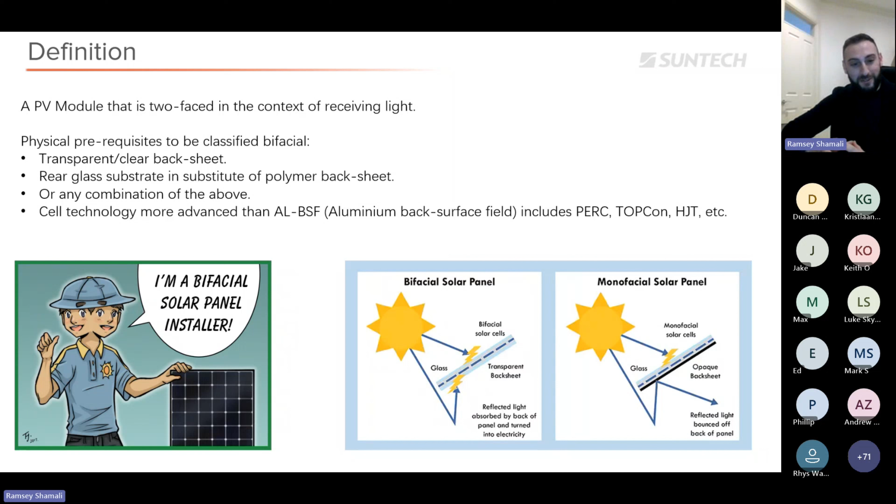So I just put a little graphic there of the installer. So if you know any installers who are two-faced and tell you one thing and tell someone else the other thing, then you can call them a bifacial solar installer. I know, a very good dad joke.

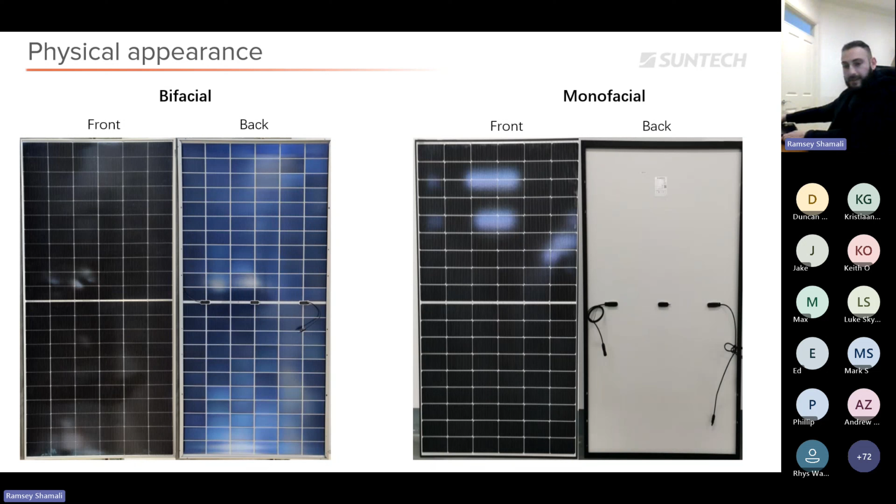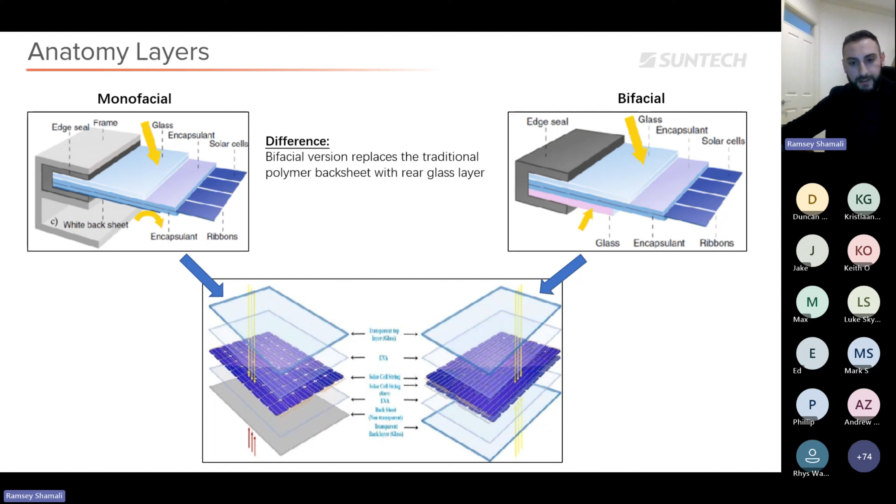So the anatomy layers are as follows. Monofacial and bifacial, what are the differences? Simply, the bifacial version replaces the traditional polymer backsheet with a rear glass layer. Everything up until there is the same. So the frame, the glass on the front, the encapsulation on the front, clear, obviously. The solar cell is the same. The rear encapsulant also will be the same. And then the last layer will be a backsheet in the monofacial, but in the bifacial, it will be replaced and swapped to a rear glass layer. And that gives it its transparent design inherently, organically, right?

Carports, on the other hand, they are elevated, they're above the ground with some height, and therefore there is potential for rear side gain.

Obviously, flat roofs are installed with tilt leg racking systems predominantly because they need to be tilted to avoid being installed flat, which most manufacturers don't warrant due to obvious reasons. And similarly with ground mount, you have either fixed tilts or tracker systems, whether it be single axis, dual axis, horizontal, or portrait. And all of these have a good utilization score because of having the rear side more visible to sunlight.

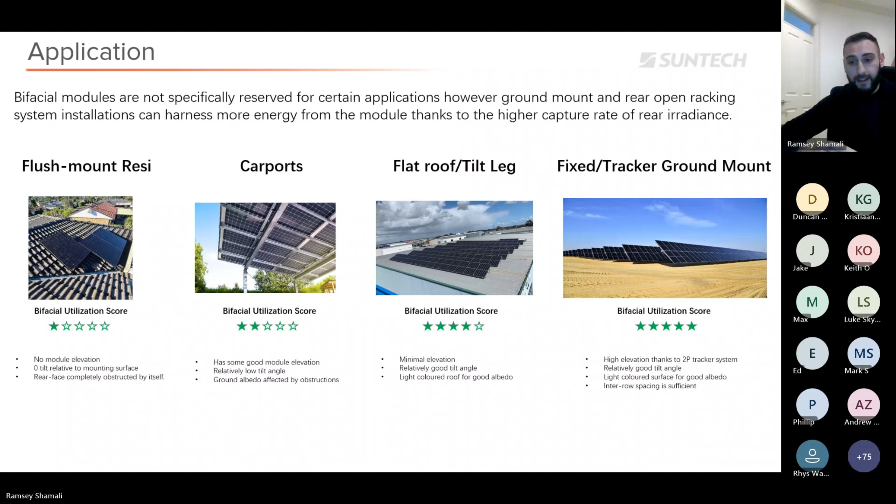There is some confusion in the industry. There is double glass products, but they're not bifacial. So what does this mean? Dual glass does not automatically translate to bifacial. There exist products on the market which are dual glass, but not bifacial. The reason for this is they have utilized a white opaque encapsulation layer on the rear. So normally encapsulation, the EVA or POE, which is the normal material used, is clear traditionally. So we don't even think about it.

But it is an existing layer always between the cell and the glass, or the cell and the back sheet for the rear side traditionally. But for these new products like our NSHKM Plus model or other products on the market from other manufacturers, when it's dual glass but it's a monofacial product, it's because yes, it has dual glass, but on the rear side behind the cell, there is an encapsulation which is white. Hopefully that clarifies it. So a product can be dual glass, but not bifacial. But it can also be dual glass, but bifacial. So dual glass does not automatically mean bifacial, but bifacial does automatically mean it's transparent.

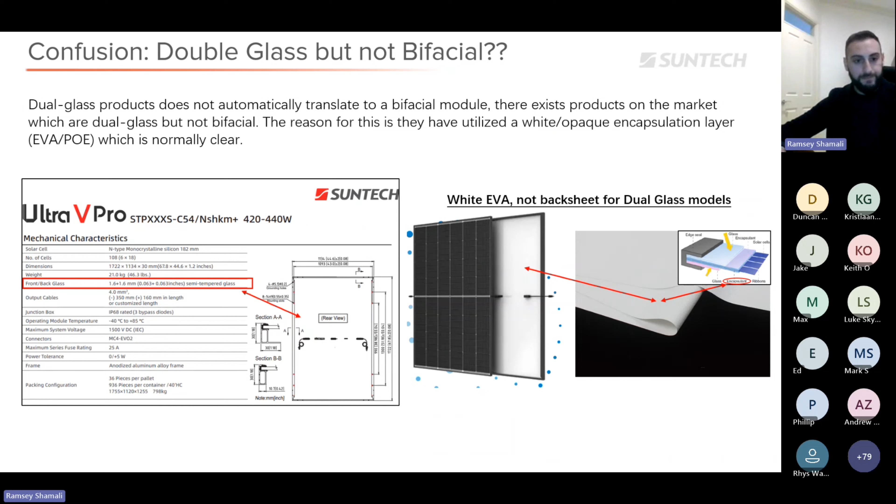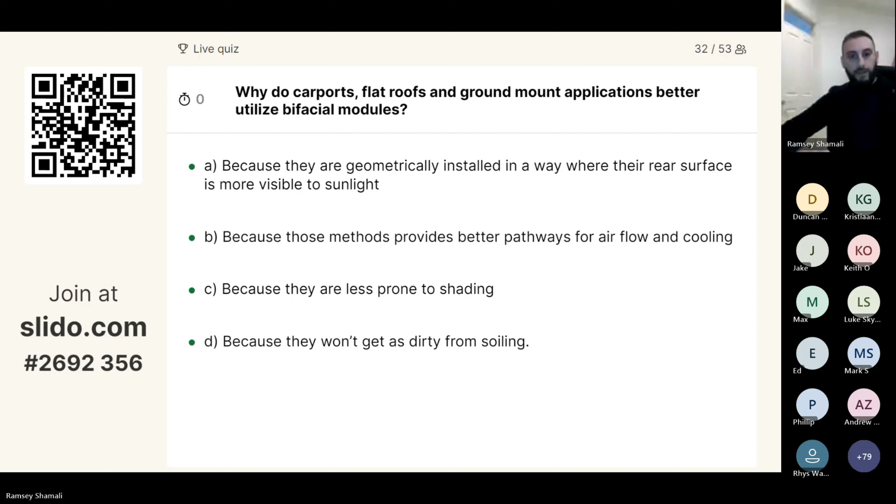All right, time's up. Everyone, majority answered A, which is correct. Well done. Bifacials, well, of course, cooling does determine and influence the performance of modules, but in the interest of bifacial gain, this is the primary factor. Well done, Max. All right, next one, 15 seconds.

Correct. Everyone answered C. Majority is correct. Well done, Brandon. Now in first place.

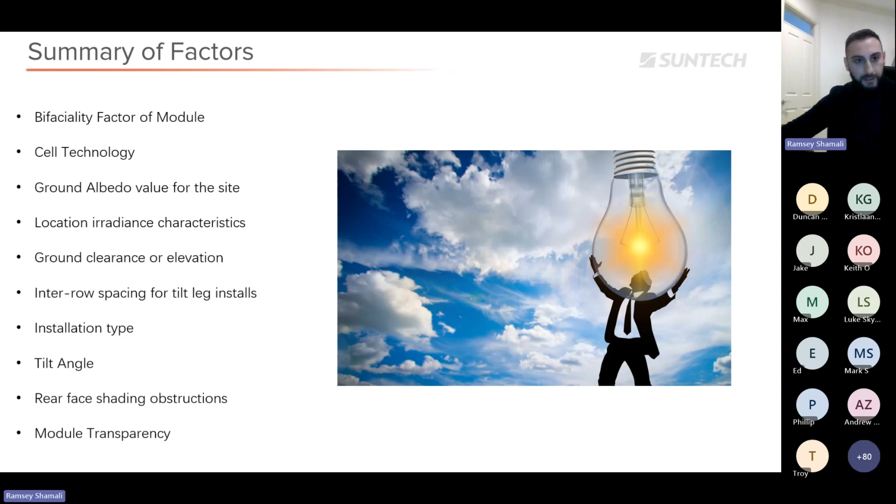It's a decimal from 0 to 1 fraction, which describes the module's ability to generate power on the back side compared to the front side. So it's simply a division calculation of the max power on the rear side versus the max power on the front side given the same condition, STC, for example. So when a bifaciality factor equals 0, it just means it's a monofacial product because the power on the rear side, no matter how much light you shine on it, will be 0, of course, because of the opaque backsheet. So 0 divided by anything is 0.

However, for bifacials, there will be a factor between 0 to 1, depending on how well the backside generates power compared to the front side. Naturally, it will never be equal to 1, and it will always be below it because of the self-shading elements caused by the J-box, cabling, the frame, right? Naturally, it is not the primary side to generate power, so it has these obstructions by nature, by its build.

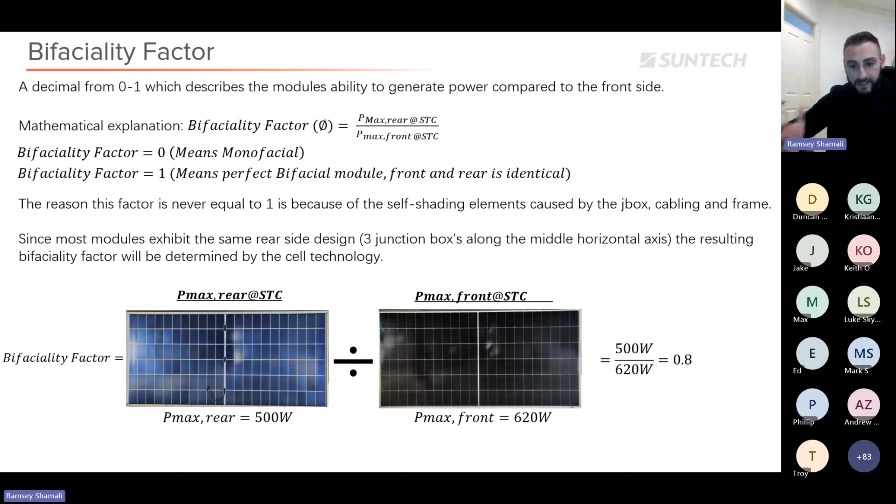So yeah, but most modules these days, as you know, are half cut, with 3 junction boxes in the middle axis of the panel. So they all exhibit the same kind of rear side design. And so therefore, the bifaciality factor will be determined primarily by the cell technology. And now at the bottom of this slide, I'm just showing you a simple illustration of what bifaciality is. So for example, in this case, Pmax rear is 500 watts measured divided by the front side at STC, 620. So in this scenario, the bifaciality factor will be 0.8.

The next factor, which is very, very important, is the ground albedo factor. So albedo simply is also a number from 0 to 1, quantifying the fraction of incident sunlight that a surface reflects. So therefore, the higher the albedo, the more reflective of sunlight a surface is. So the easiest way to use albedo values is to simply cite them from reference tables online, as seen below.

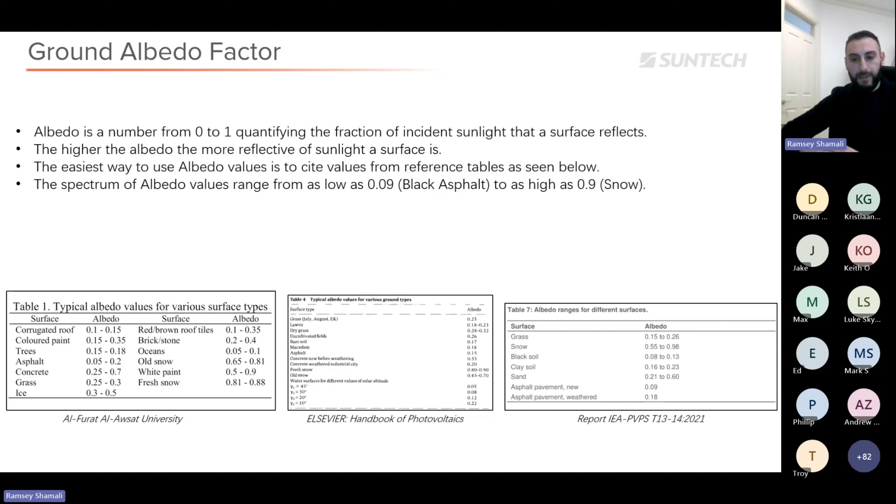And the spectrum of albedo values ranges from as low as 0.09, which is representative of black asphalt, to as high as 0.9, which is something like snow. So naturally, black surfaces absorb, and light surfaces reflect. So this is in agreement with this general knowledge concept, right? And all online reference tables are pretty much in agreement with each other. So if you simply Google it, the first one you find will be fine. You can reference that table. So you can see it ranges for a myriad of different surfaces that are relevant to us in the field, whether it be grass, asphalt, concrete, soil, ice, wherever you may be, you use the relevant value for your installation.

The first method is just citing values from reference tables, which is fine and normally quite accurate, obviously. However, if you want to go a step further and do some other measurement to verify it on your site, you can do this albedo measurement via irradiance measurements. So you can either use a pyranometer or a Fluke irradiance meter, which some of you might have as installers, and you can measure the global irradiance from the sky. So you just literally face the sky with your meter, take a measurement of the irradiance, watts per meter squared.

Then you do another measurement facing the ground of where your panels will typically be installed. Make sure you stand at least 0.5 meters above the ground. You don't want to be too close, to get a more accurate measurement. And you just divide the two. So you divide the one facing the ground by the one facing the sky. This will give you a good, accurate albedo value. And you can walk around the site and do different measurements to make sure they're all in agreement with each other.

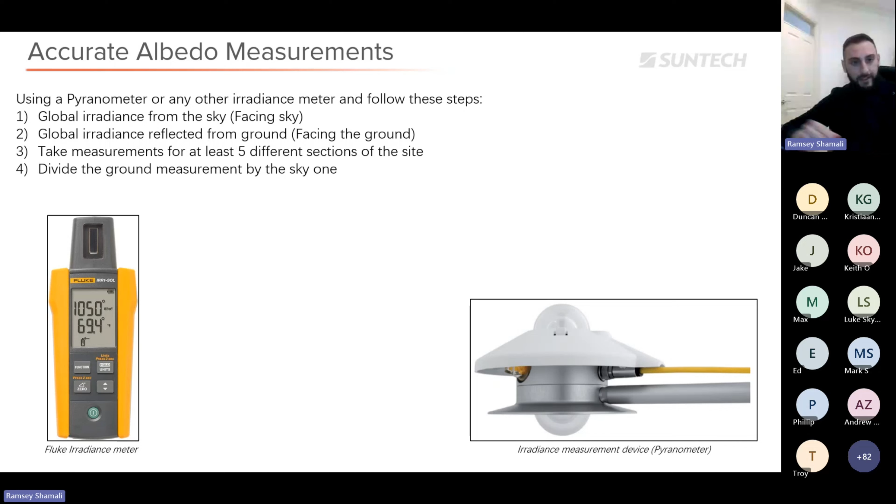Right. Next is irradiance. So as we know from computed weather data, we are provided 3 different types of irradiances that we can work with. GHI, which is global horizontal irradiance, depicted in yellow. DNI, direct normal irradiance, depicted in green. DHI, diffuse horizontal irradiance, depicted in blue. So all these are just different types of irradiances that are relevant for our power simulation of PV module output, right?

And simply, global horizontal is the sum of everything hitting a horizontal plane. Direct normal is a direct beam of irradiance hitting a plane perpendicularly to it. So that is the maximum irradiance that the beam can be. Anything away from 90 degrees will be lower and lower due to the trigonometric factors. And diffuse horizontal irradiance is obviously any scattered sunlight hitting clouds, hitting obstructions, hitting other things, and finally making its way to the surface after being scattered.

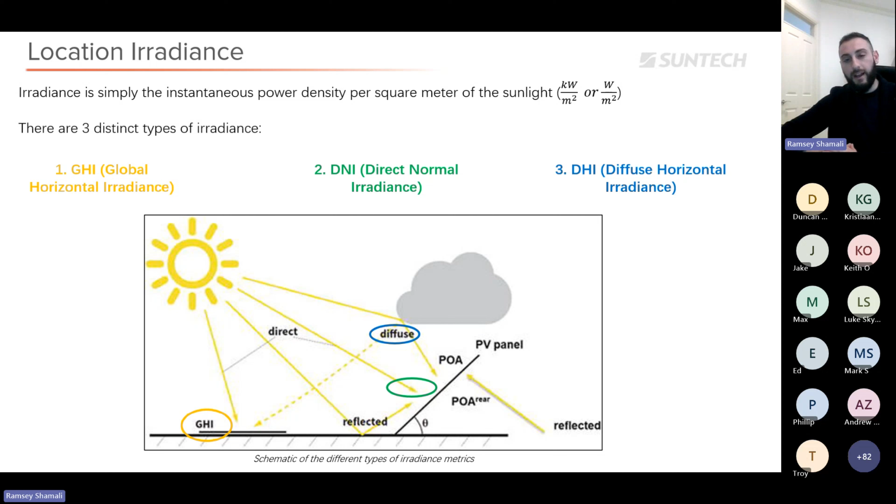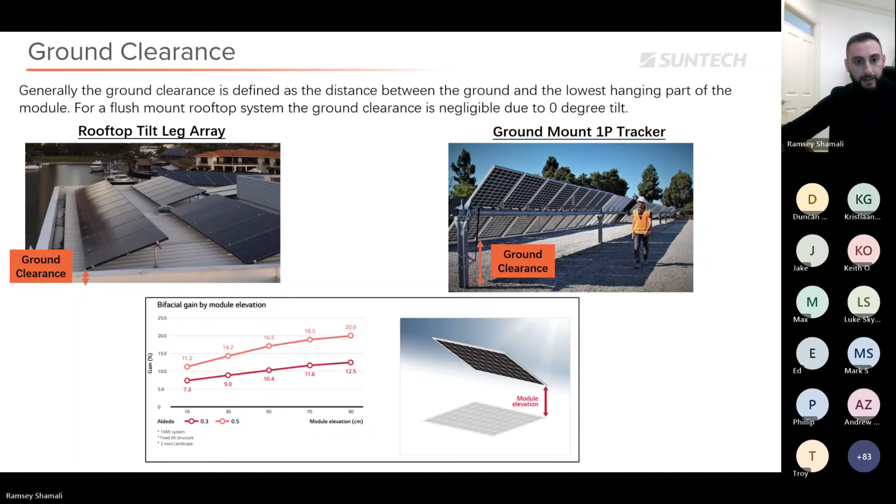Now, tilt angle is another one we're already familiar with, whether it's monofacial or bifacial, right? There is an optimal tilt for any geographic location in the world. The rule of thumb normally is to match your tilt angle with your latitude value. So here in Sydney, for example, it's minus 34 degrees. So that means 34 degrees roughly is the optimal tilt angle for maximum year-round yield for, I believe, a typical

north-facing system, okay? For bifacial, however, this changes a little bit for scenarios where you do have a very high albedo surface. So you already know what albedo is. So if the albedo is high, then the optimal tilt angle for bifacial, studies from NREL and other institutions show, will be maybe about 10 degrees higher than the optimal tilt for monofacial.

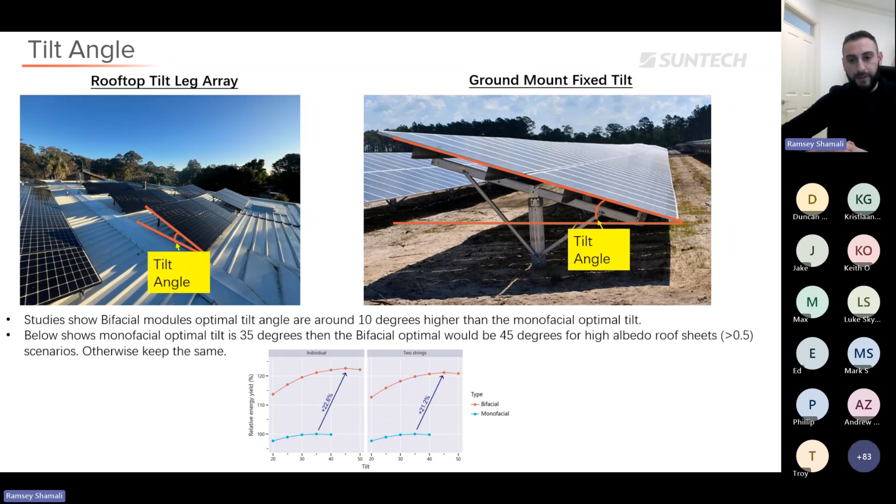Module transparency is another factor, not to be overlooked. It's defined as how much light passes through the transparent gaps between cells and the frame perimeter in the module, right? Now, bifacial panels have transparency because of the gaps between the cells, and there is no backsheet anymore. So light gets through, and for general products on the market, it's in the range of 2 to 5%. So this is something to keep in mind, and the software that is accurate will request this parameter as an input.

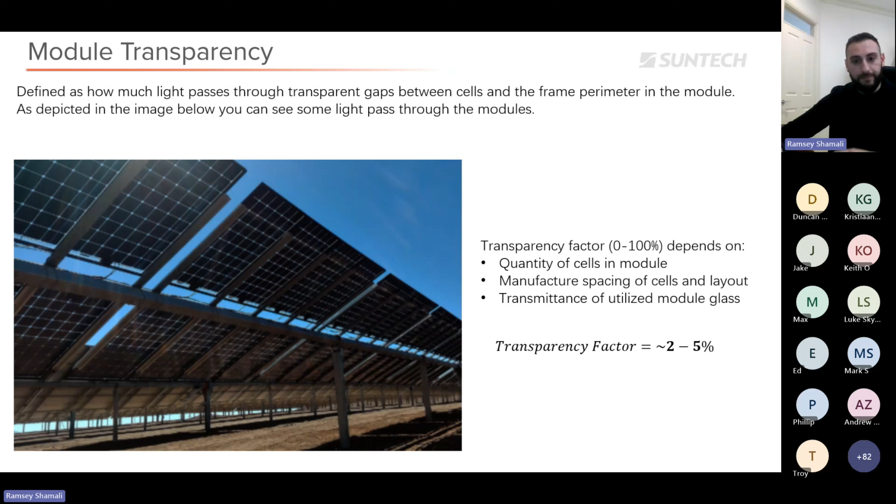Sun's position is kind of an indirect influence on bifacial gain because we use the sun's position for other things, such as for flat roof systems, we use the sun's position for inter-row spacing calculations. So normally, correct me if I'm wrong again, the rule of thumb is to space your rows based on the winter solstice day of the year, and based on the elevation angle of the sun, you use that angle to calculate inter-row spacing. So there's a fantastic tool online on PV Education. You just plug in your longitude, latitude, time of the day and day of the year, which I just mentioned.

Winter solstice is the 21st of June in the Southern Hemisphere, which is where we are. And it will spit out all these different output sun angles. And the one we're concerned about is elevation. Right, so even in this screenshot, I have done the winter solstice day for Sydney, and it shows an elevation of 33 degrees. So that means when you stand and look at the sun on winter solstice day, 21st of June, the sun will be 33 degrees high in the sky. So this is the angle we use to calculate inter-row spacing.

And you guys already know how to do it, but this is just a quick refresher. You just need three parameters: the module length, the tilt angle of the module, and the elevation angle, which I just described in detail now. Once you have those three, it's quite simple. Module length times sine of the tilt divided by tan of the elevation, and you get it.

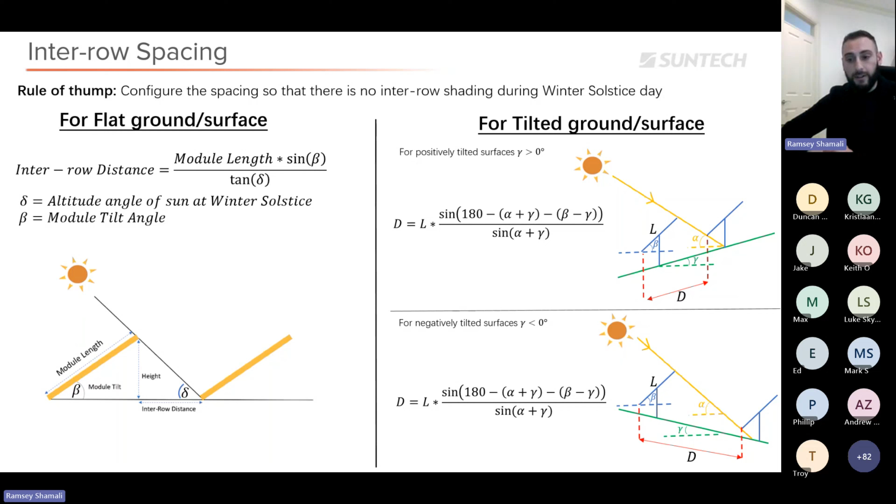Now, also, it's worth noting there are also more losses in the rear because of the mounting systems, whether it's the torque tube on a tracker system or the rails and legs on a tilt leg system, right? So this also affects the output, and some software takes it into account, some don't. So you need to be aware of this as well, what assumptions are made.

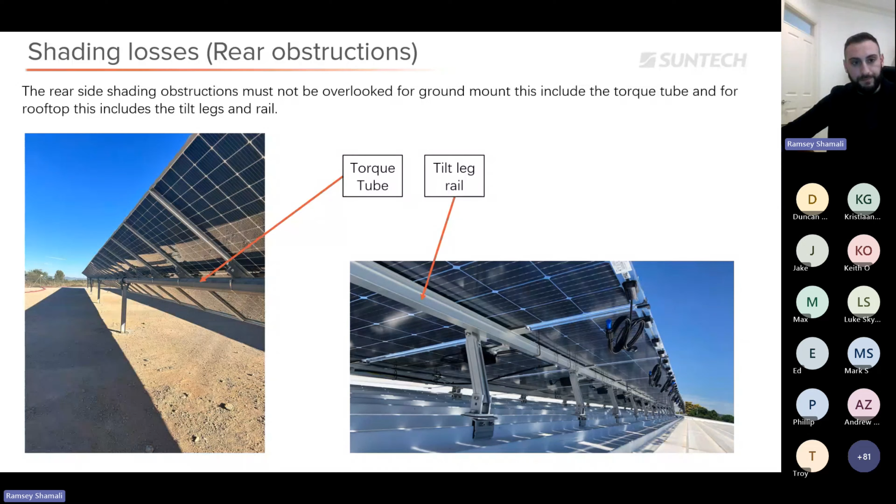IAM losses is incidence angle modifier. So obviously, the more shallow the angle is hitting the interface surface, the more chance it will reflect. And this needs to be taken into account as well for the rear side incident sunlight. So you need to make sure also that your software that you're using takes this into account to be very accurate as well.

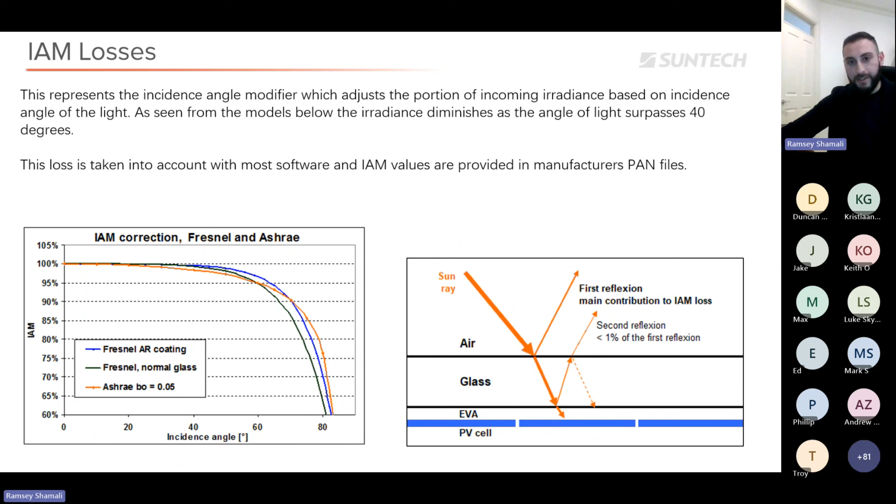All right, that concludes the chapter on factors which influence bifacial gain. Let's refresh the memory and see if you guys are ready for the quiz. So please, again, scan the QR code and we will begin this next set of 4 questions.

All right, guys, are you ready? Or have you scanned the QR code? Is it working? Can Andrew let me know, please? Yeah, I have joined. Perfect.

All right, 15 seconds. What is the bifaciality factor for TOPCon cell panels? Time's up. Let's see. So everyone is answering majority 0.8, and you are all correct. Well done, guys. Let's check leaderboard. Is it still the same person? I think so. All right, next question.

Which statement best describes bifaciality factor? 17 seconds, go. All right, excited to see the answers. And majority have just edged the correct answer. So the correct answer is indeed B, the ratio 0 to 1 between the rear side power output divided by or versus the front side. So well done, guys. This one was more of a question of how well you read the answers. Well done, guys. New leaderboard here.

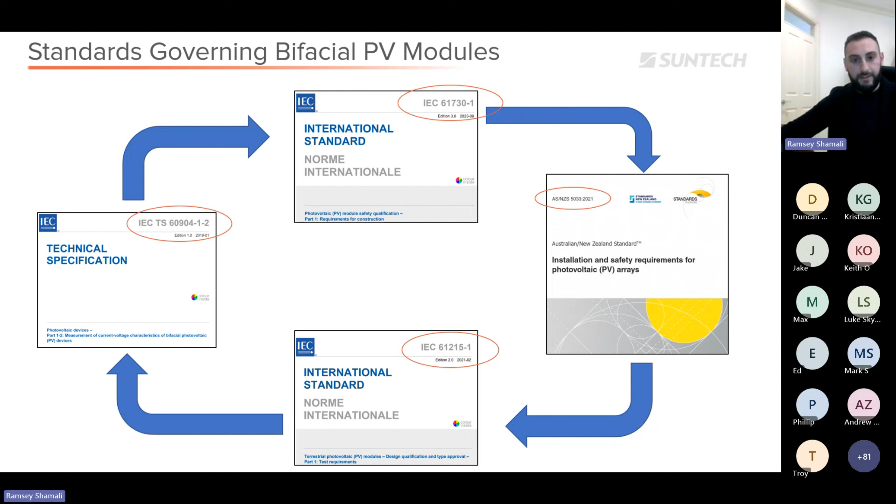Starting with IEC 61215. Now, clause 11.11 mentions that there are 2 new irradiance conditions to represent bifacial modules, elevated current for the module quality tests. So these are, one being the G, which is irradiance of BNPI, and this is equivalent to 1000 watts per meter squared, which is obviously the STC front irradiance condition, plus this symbol, which is representing bifaciality factor, multiplied by 135 watts per meter squared. So that's for BNPI. We touched on BNPI earlier, bifacial nameplate irradiance, and this value is 135 watts per meter squared on the rear side.

Now, the second one is GBSI, which is the irradiance at the bifacial stress irradiance. And the stress irradiance is at 300 watts per meter squared, so a very large rear irradiance level, representing the most extreme case. So this is also outlined in clause 3, where it just explains the abbreviations of these two and what they mean. And in appendix A.2, it gives the procedures for bifacial modules, and also explains why 135 watts per meter squared was actually utilized as the BNPI value.

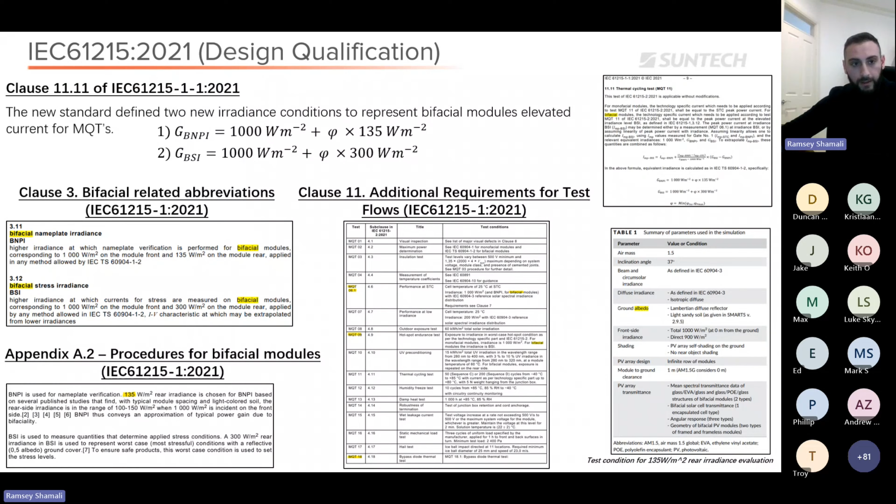Now, going on to the safety standard, 61730, they obviously updated some new requirements to take into account the bifacial modules on the market, right? So now they want us to measure and report and label the VOC, ISC, Pmax, and all other characteristics at STC, which we already do, plus BNPI. And also the nameplate should include bifaciality factor for VOC, ISC, Pmax.

Now, for your information, the bifaciality factor for VOC will just be 1. As we know, the module's ability to generate current is linearly proportional to the irradiance hitting it. However, for voltage, this is not the case. There is no linearity, proportionality, between the voltage output and the irradiance. So whether you have 1,000 watts hitting a panel or 100 watts, the voltage will still be the same.

You can test this yourself with the multimeter, and you can look at it yourself when you review the data sheet's IV curves. You can see that they give you IV curves for all the different irradiance levels, ranging from 100 to 1,000. The current drops linearly, progressively, but the voltage is pretty much the same value, around 38, 39, 40 volts, something like this.

So that's why, if you measure the voltage when the rear is facing the sun versus the front, it will just be the same. So it's 1. But as we know already, for current and power, it's going to be dependent on the technology. So we know it's 0.8 for TOPCon.

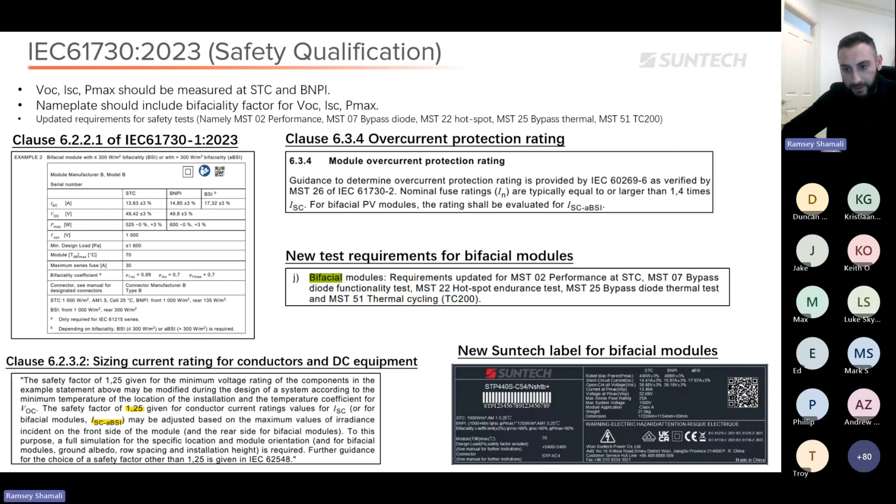Now, the AS5033 is pretty short and sweet. It doesn't really detail much info, but the only relevant ones are these two here as follows. Clause 3.3.3.1a is giving you the formula to calculate the maximum string current for the array. So historically, it's simply 1.25 safety buffer multiplied by short circuit current of the module. Simple. But now with bifacials, there is just one more factor you have to multiply, which is this K factor.

This K factor is described in Appendix J, and it's simply the enhanced bifacial current divided by the normal STC current. So we already have an idea how to calculate this now, because even in the new data sheet labeling, they'll give you the enhanced current at BNPI or BSI, and you just divide that by the normal current, and that's your K value.

But another way to interpret the K value is just simply 1 plus bifacial gain. So if your bifacial gain is 5%, whether it's calculated through manual calculation, software, a third-party case study, or empirical data, your K value will be 1.05. Hopefully that makes sense. So you can see your calculated string maximum current will be that little bit higher because of this bifacial gain.

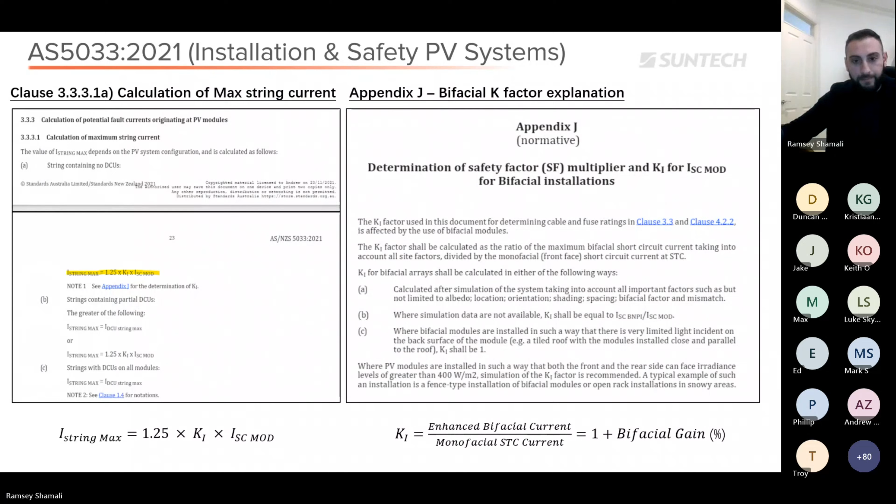And the last standard that I mentioned that referenced bifacials is the test specific standard for bifacials. And this basically outlines a test procedure to characterize the bifacial module in terms of the bifaciality factor. And also they do tests at varying levels of rear side irradiance from as low as 60 watts per meter squared all the way to 250. And it gives you the respective voltage, current, power, etc. So this is good for sending to developers or EPC contractors who want to verify the performance output of your bifacial panels.

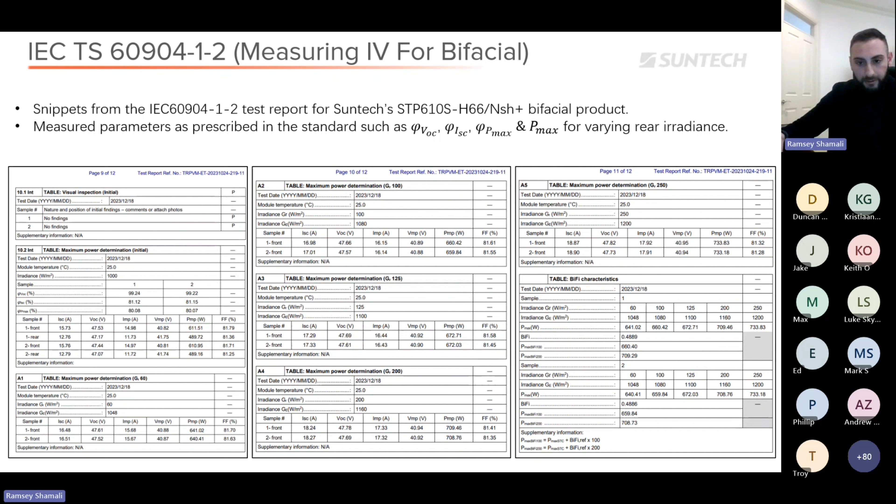All right, let's review this chapter together. So please get ready for this next round of 4 questions. I'll give you a few seconds and we'll get started.

All right, let's go. How many different standards have published clauses containing relevant information about bifacial PV modules? 3, 2, 1, and let's see. Correct, guys. You're really quick learners. Great job.

Next question. What does BNPI stand for? That's it. Let's see. Majority answered A, bifacial nominal power index. Sounds right, but is it really? Let's check. No, in fact, maybe this one was overlooked by you guys. So it's bifacial nameplate irradiance, simply.

According to IEC 61215-2021, what is the irradiation value on the rear side that IEC has deemed appropriate to be used for BNPI? And good job, guys. C is correct, 135.

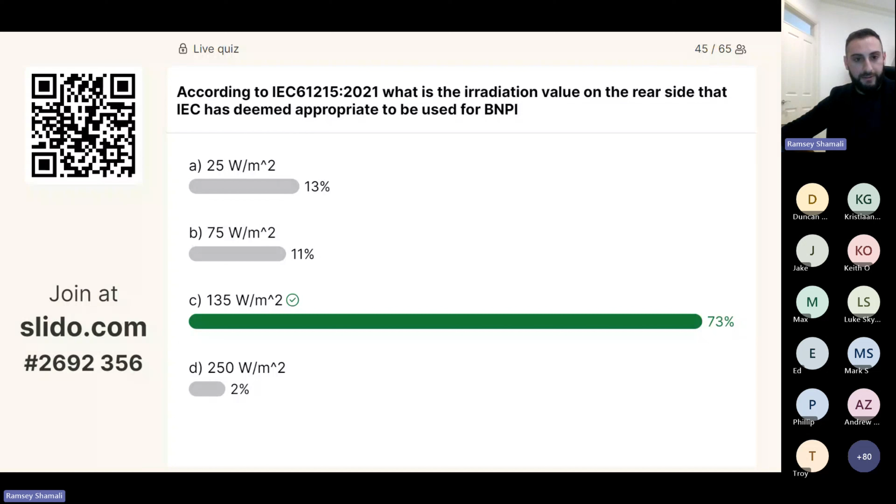All right, last one for this chapter. According to IEC 61730, what label rating method should manufacturers use to print their bifacial characteristics? Perfect. So almost majority scored B, which is correct. Well done, guys. All right, now moving on to software tools.

So this is more, the first 3 chapters, guys. Sorry if it's overwhelming, a little bit technical and theoretical stuff. This is probably more relevant to your everyday activities. So let's talk about some software tools in the field. Going from left to right on this slide, I'm just demonstrating from lower complexity to higher complexity of bifacial modeling for PV modules. So there's 3 different methods that are available right now to model rear irradiance, how much is hitting the rear surface and consequently how much bifacial gain.

So the simplest method is the empirical model. And this is simply a bunch of vendors, whether it's laboratories, researchers, manufacturers, including us, releasing case studies of specific systems with specific setups, and giving the resulting bifacial gain. So this is one good way: if you see any case studies which have a pretty similar setup to your system, you can simply take their output results as representative of what your bifacial gain might look like.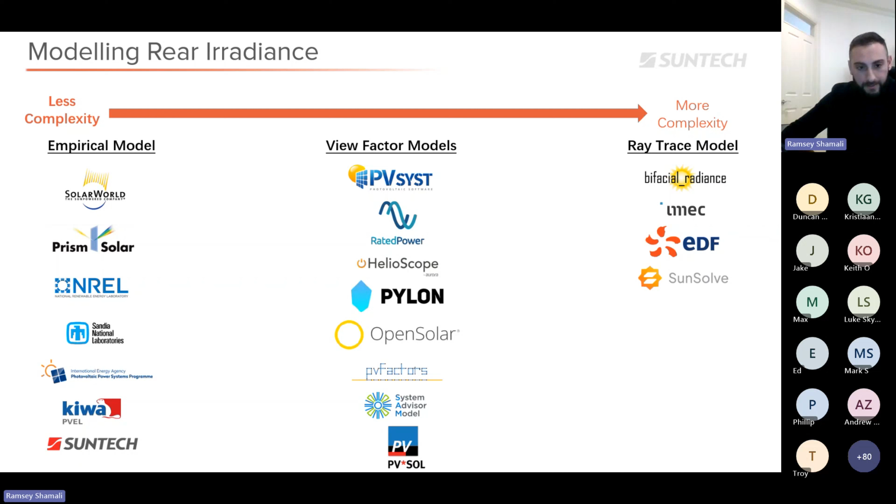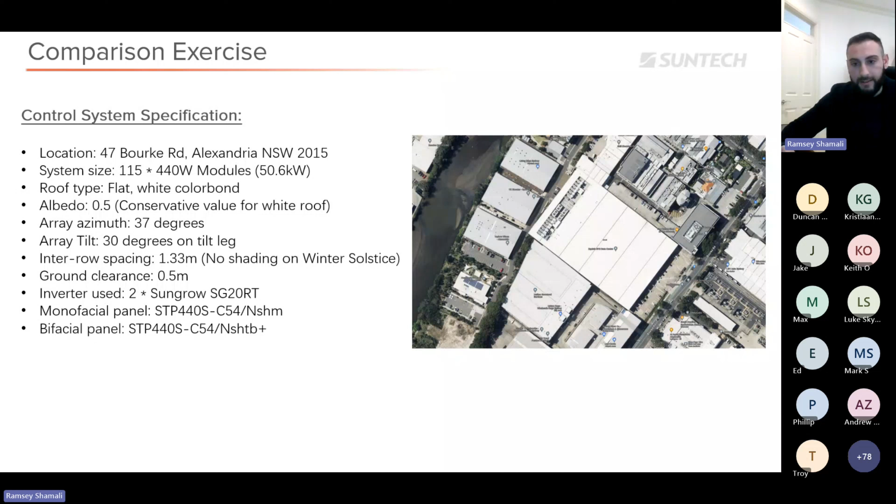So I wanted to, on behalf of my fellow solar colleagues, do some tests and use all the different softwares to see what they're yielding in terms of quantifiable bifacial gain. So first I set up a control system with these parameters. So specific location, size, roof type, albedo, azimuth, tilt, etc. And I used our NSH-TB Plus to represent the bifacial system simulation, and I used the NSH-M to represent the monofacial system simulation. Let's see the results.

So first, I used Pylon. So you guys are familiar with this software. It is a very cost-effective rooftop solar design proposal software. It's like $4 per simulation, something like this, and it's quite popular. So I tried to check it out, and unfortunately, the monofacial annual yield was 73,000, and the bifacial one was also 73,000. And this therefore concludes that it uses no active bifacial model method. So you cannot rely on this software for bifacial modeling.

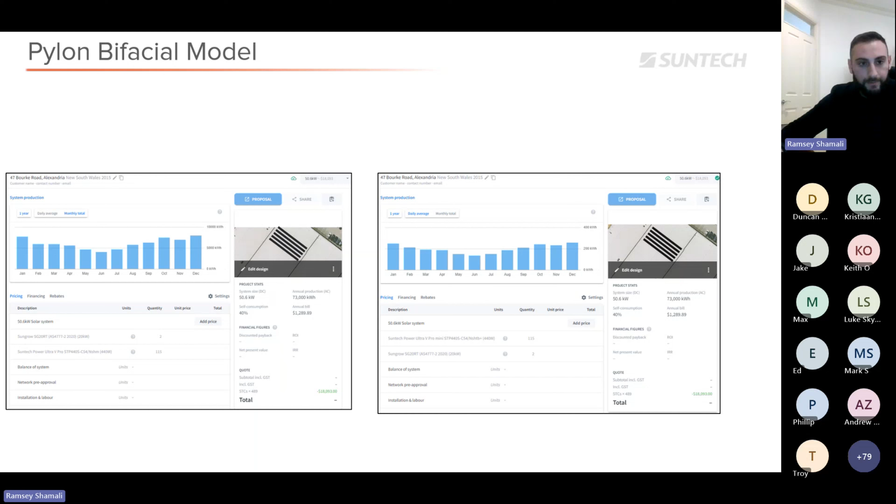Next software, which was Helioscope. This is a bit different to Pylon. It's more of a monthly subscription fee and a little bit more expensive, more for enterprise grade companies or EPCs, stuff like that, and also popular for C&I projects.

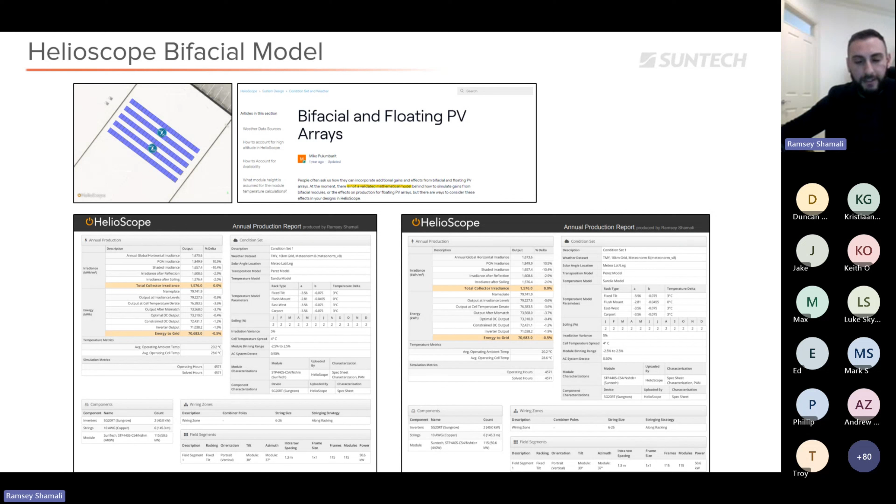Anywho, I did the same test with the same product, same control system parameters, everything. And unfortunately, both monofacial and bifacial yielded the same output for the annual yield of 70,683. So again, even these guys publicly listed on their website that they're not using any mathematical model to simulate bifacial gain. So that concludes that. So far, Pylon and Helioscope, no.

Next, I tried OpenSolar. This is free to use to the public and based on a manufacturer contribution royalty to keep their revenue stream. Anywho, there was a slight difference I found in this one actually, and basically the monofacial was 73,177 kilowatt hours per year, and the bifacial was 74,285. So very small, but still something, and it shows that there is some sort of mathematical model going on.

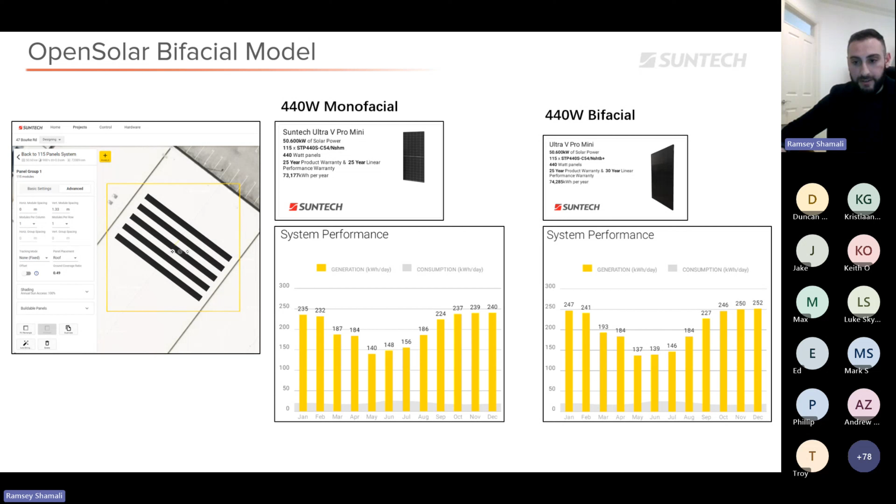And I could verify this because they did ask for some parameters that are relevant to bifacial gain influence, right? So like spacing, like the ground coverage ratio, and the bifaciality factor as well of the module they asked for when I was inputting the inputs. So yeah, OpenSolar does yield some difference there.

Next up is SAM, System Advisor Model, created by NREL, open source platform developed by all the smart minds there. Free to use to the public as well. It's a desktop application, so you don't have to go online. You can download it and it's available offline forever. Anyway, this one is very accurate because it does have an active bifacial gain model.

And it was obvious because in the module selection part, it asked me to input if the module is bifacial. Then it went on to ask me for transmission fraction, which is that transparency factor I talked about. It asked for bifaciality, ground clearance, albedo, etc. So it asked for all the right things, basically. And in the end, you cannot see it, but I'll read it out.

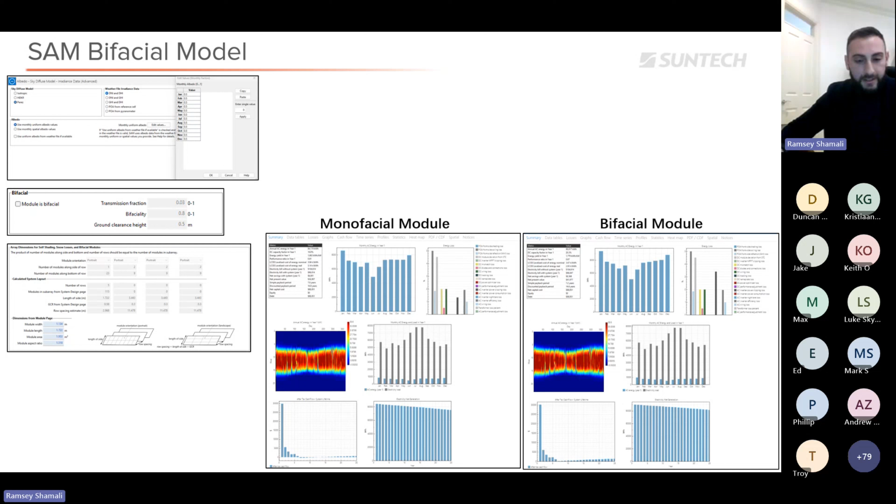The monofacial system yielded 84,174. The bifacial yielded 90,017. So this is about almost 6,000 kilowatt hours more per year with the bifacial system. So this successfully computed the bifacial gain.

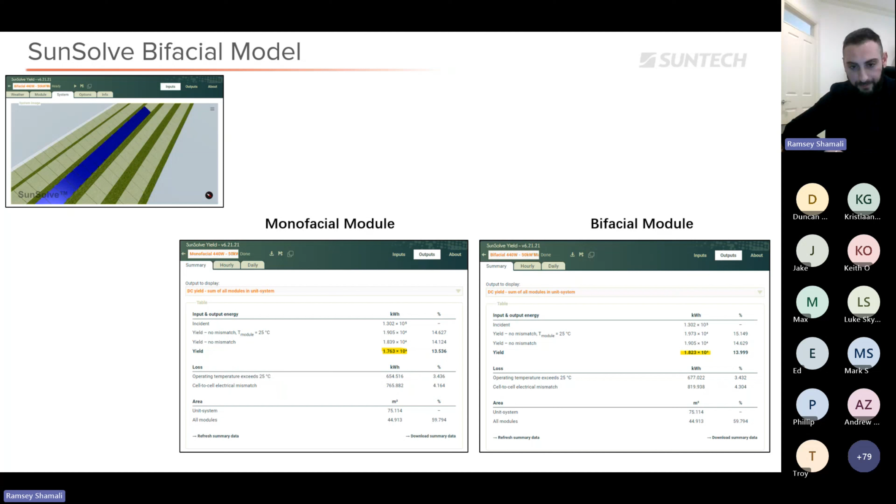Next up is SunSolve, and this one is a paid subscription based on membership, and it's using a ray tracing model. So this one took maybe 10 minutes to actually simulate, so it took very long. And in the end, there was a delta between the two annual yields between monofacial and bifacial, and it was in the order of also a couple of thousand kilowatt hours. So that's great to see.

So in summary, Pylon and Helioscope, there was no bifacial gain displayed, and therefore these software tools are deemed not suitable to realize the bifacial gain. OpenSolar showed a 1.51% gain between the bifacial and the monofacial. So this one perhaps is not accurate, but it is still deploying some sort of model. So hopefully OpenSolar can build upon that or make their methodology more publicly available, so we can have a better understanding and see if it's really accurate.

System Advisor Model yielded the highest difference. So whether this is true or not, it's still promising to show that there is a difference based on the inputs we put. So it was almost 7% bifacial gain for these two systems. And SunSolve, the ray tracing one, which is supposed to be the most accurate one, yielded 3.4% yield gain.

So all in all, I think SunSolve is definitely probably the most accurate, so it's best to rely on that one. However, for the purposes of proposals, it's nice to show SAM as a method of showing the bifacial gain. Perhaps there are some assumptions in SAM that make it a little bit different to SunSolve's results. But anywho, this is just for your reference, guys, and you can play around with it yourself and see how you go.

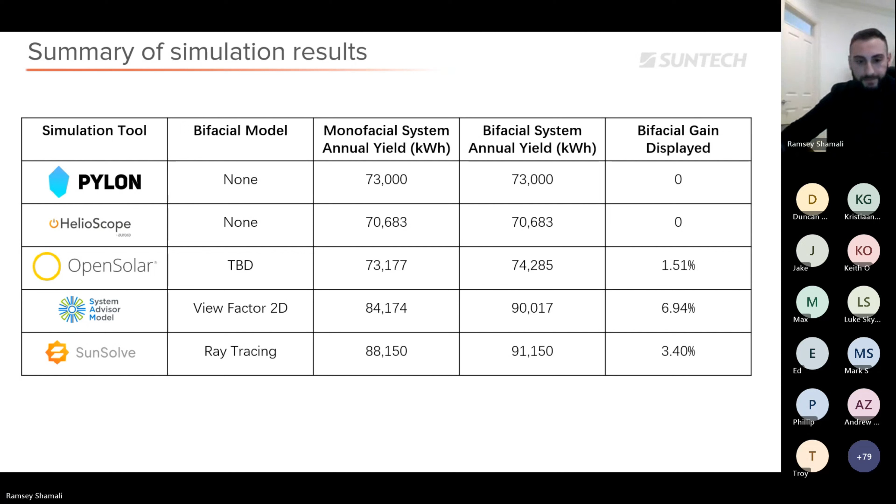All right, next round. So let's see how we go with the next 4 questions on software tools. All right, let's get started. So which bifacial modeling method strikes the best balance between accuracy and practicality? So ray tracing is the most accurate, correct? However, the correct answer truly is view factor because of its turnaround speed for simulations. It's very practical for the everyday installer or a rooftop application, like System Advisor.

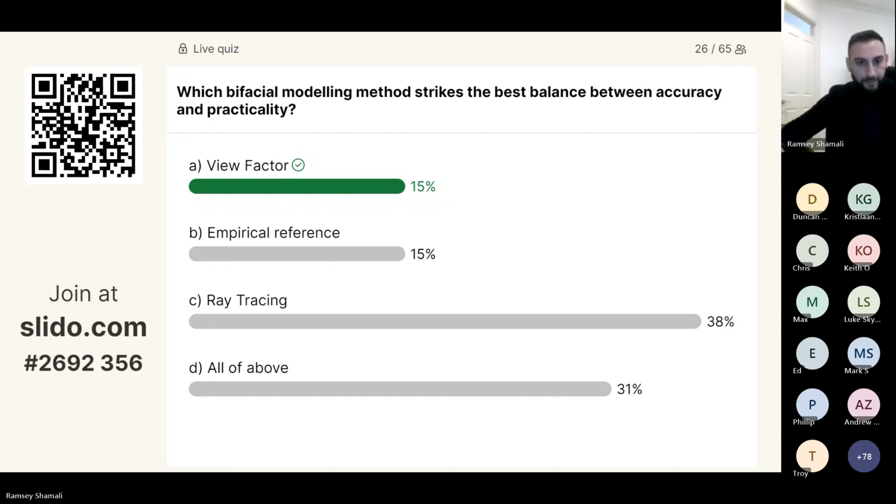Which popular solar software platform listed here does not support bifacial modeling? This one should be quite straightforward. Hopefully everyone gets it right. Correct answer is D. Now, I didn't present on PVsyst because I couldn't get an account. Apologies about that. But PVsyst is primarily a solar farm software tool, so you'd hope it has bifacial gain modeling, right? So yeah, the answer is Helioscope, as we saw in my study. It did not have any model available.

Next question. Which software is free and best calculates bifacial gain? So free is important. This is why I came up with this question.

Correct, guys. The answer is B, SAM. So System Advisor Model. It's not a very nice interface. It's pretty hard to use, probably for the beginner. However, as you use it more and more, you wrap your head around it, and it's perfect to work alongside your existing design proposals to provide the model for energy yield estimates. So I wouldn't use it as your primary software tool, but it is an addition to your arsenal of tools to use, especially for bifacial gain calculations.

When using bifacial modeling tools, what are the common input parameters needed? Yep, everyone is spot on. Well done, guys. So it's quite obvious now at this point of the presentation, all of these factors are important.

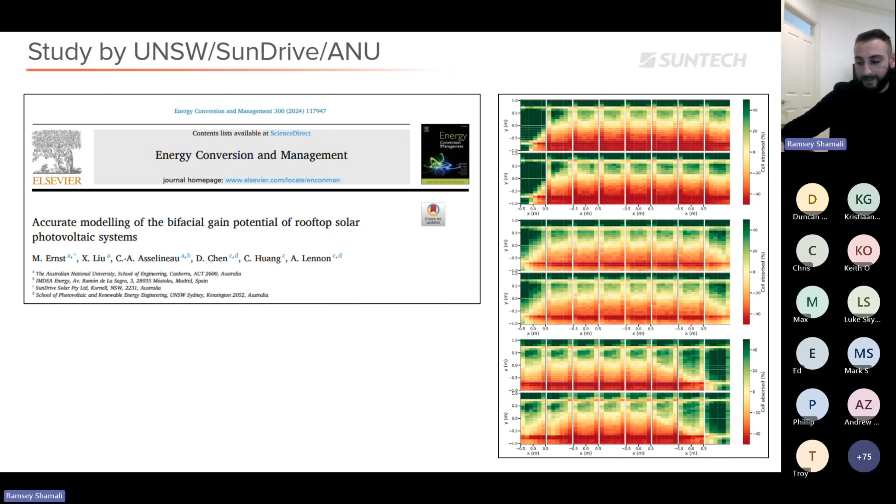But this doesn't really affect modern day technology panels thanks to half-cut cell circuitry. As you know, the top half and the bottom half operate independently in the panel because of their parallel circuit arrangement. So this does not put any additional stress on the panel, don't worry. And this distribution of irradiance also doesn't affect the energy yield either. But it's just worth noting. And this is also another study in agreement with this conclusion that the top of the panel sees more sunlight than the bottom in a typical flat roof mount system.

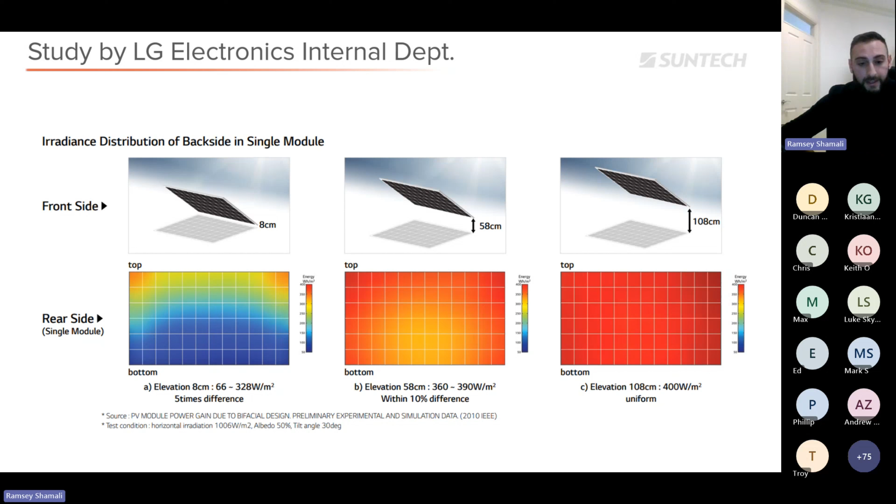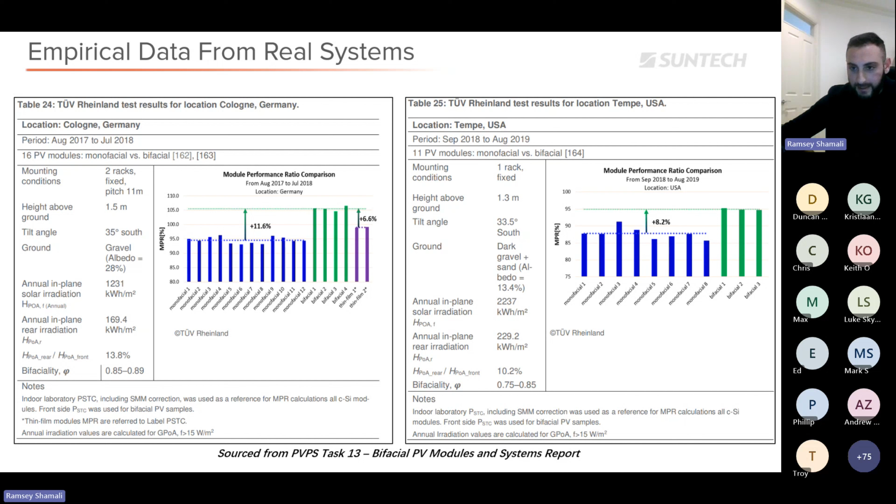Now I want to present some case studies or empirical data from different countries around the world done by TÜV Rheinland. And basically, they're all similar systems with similar mounting arrangements, similar height above the ground, similar tilts, and all of them just differ in terms of the location and albedo slightly. So you can see this system in Germany is showing around 11% gain. This one in USA, 8.2%. Then there's one in Saudi Arabia showing 12.7, and one in India showing 22.4. So very, very high gain there.

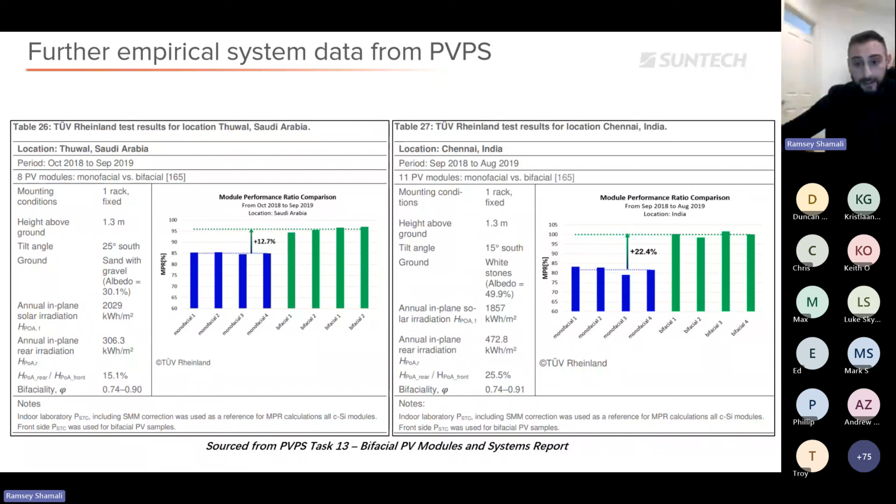And the explanation for this is simply, if you refer to the albedo value for this particular one, it's pretty high. It's 0.5, while the other ones are in the range of 0.28, 0.3. So you can see how powerful the albedo factor can be in dramatically increasing your bifacial gain.

And here's another study just comparing fixed tilt to SAT, single axis tracking. And generally, they do conclude that single axis tracking is a little bit better for bifacial gain. I mainly think this is because the ground elevation is a bit higher, plus the mounting system is a bit less obstructive compared to fixed tilt, because it's just simply a torque tube, and that's pretty much the only obstruction, right? But with fixed tilt, you've got all the different cross member rails that can cause a lot of self-shading on the rear side.

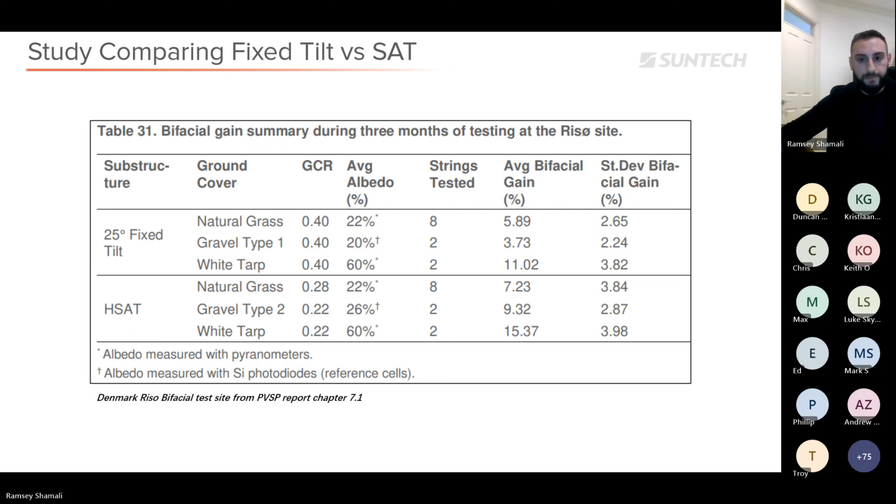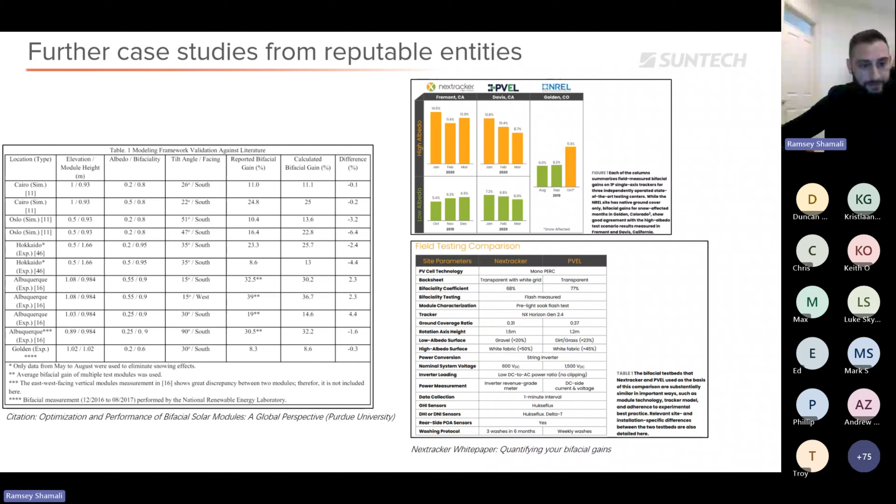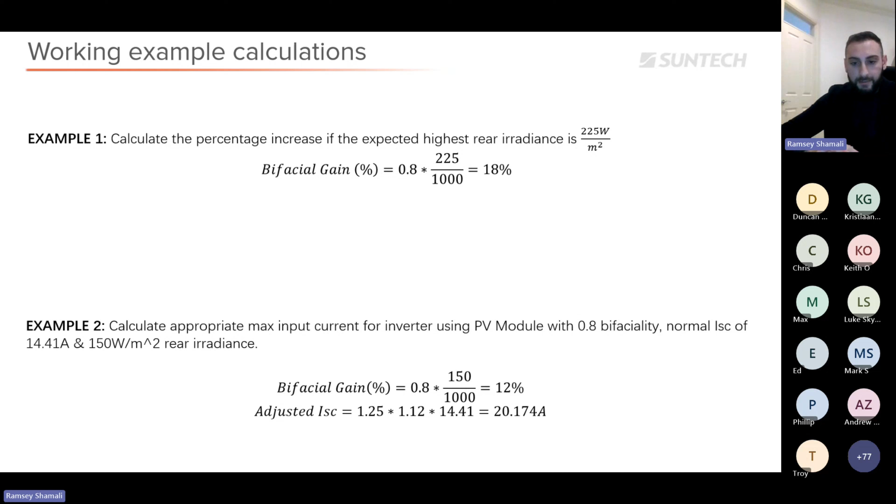Then we learned from the IEC standard for bifacials or the AS5033 that to work out the new max short circuit array current, you do 1.25, the safety factor we're already aware of, multiplied by the K value. And the K value in this case would be 1.12 because it's 1 plus 12%. So 1.12 multiplied by 14.41, which is the normal current. So now the adjusted short circuit current for this bifacial gain is 20.174 amps. So you want to find an MPPT tracker which has a higher max short circuit current than 20.174 amps.

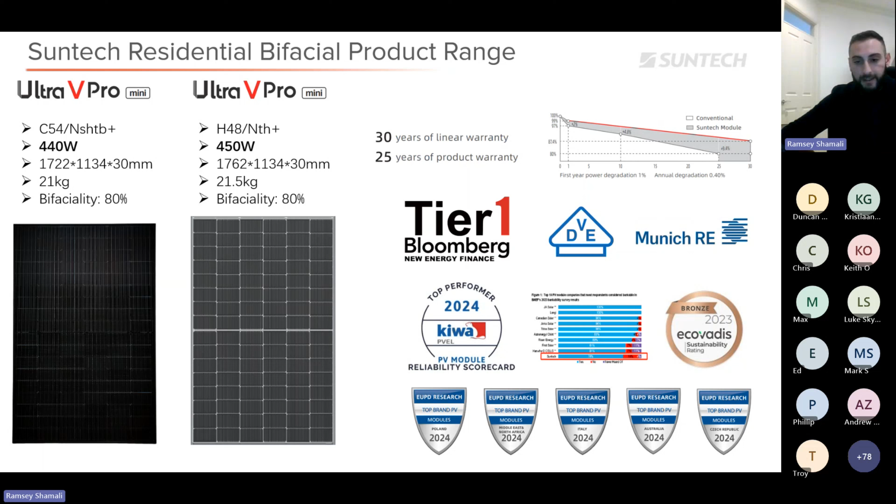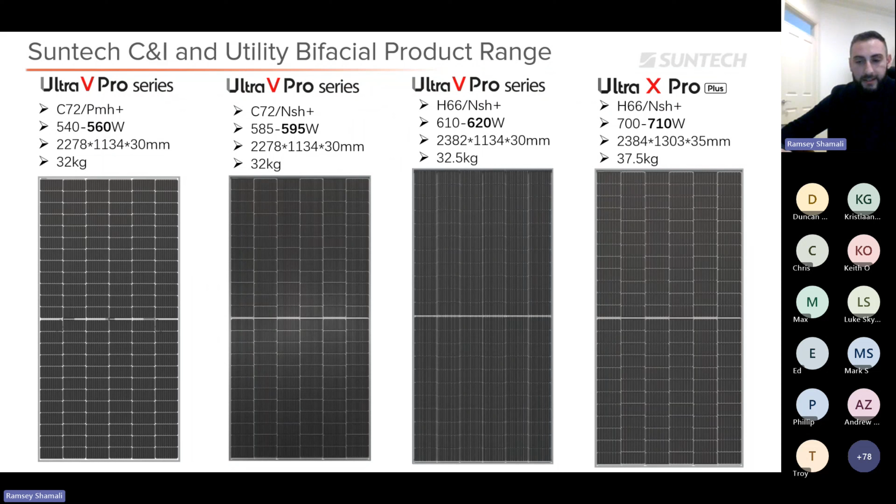So guys, key takeaways: bifacial gain can range anywhere from 0 to 25% and depends on a myriad of factors as presented, however the most influential being the albedo, or the ground reflectivity. And most modern design tools have not adopted a bifacial gain model and cannot capture this in the annual energy yield estimates, right? But tools like SAM and more complex ray tracing models can capture the gain estimate.

The new standards have instructed manufacturers to provide reference bifacial ratings at BNPI. So if you're not sure, and based on this presentation you still can't gauge what your bifacial gain will be like in any particular installation scenario, then your fallback and your rule of thumb would be to use BNPI as a bifacial gain. Okay.

And this area for bifacial gain modeling is still maturing, it's still new, and solutions are slowly being released for the rooftop scenarios because this was never considered before. But now all of a sudden, the whole industrial chain is bifacials. So naturally, it will be used in rooftops, and the energy gain capture will be more and more accurate and easier to compute as time goes on.

So as much as I try to capture and portray as much information about this topic as possible, it's not a complete research and definitely would be ongoing.

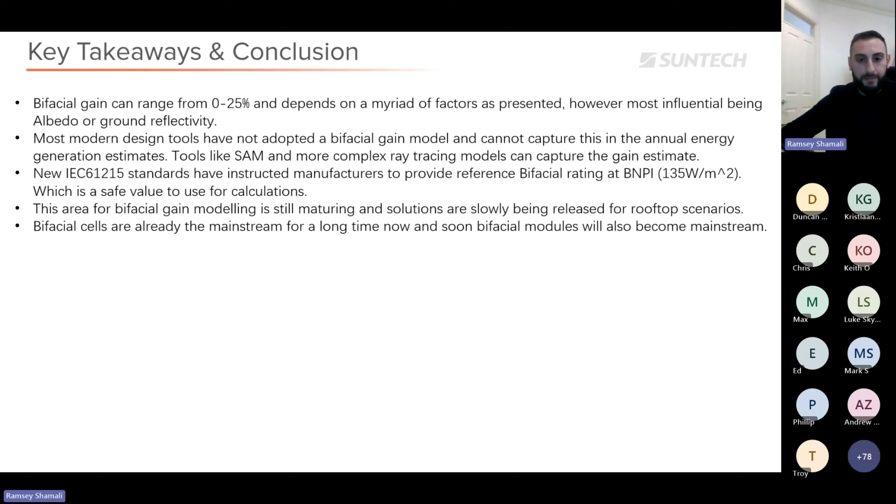But yeah, bifacials are already in the mainstream for a long time now, and soon it will be the market-dominant option. So this is why hopefully this training is valuable to you.

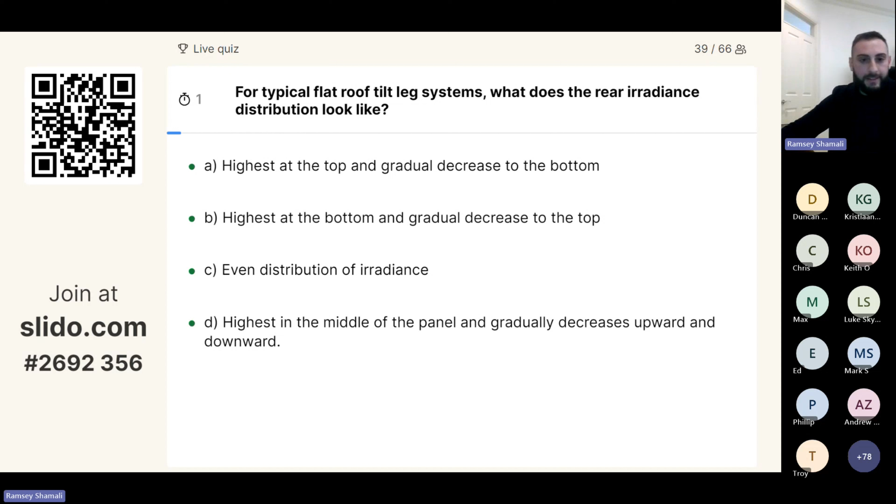Let's conclude with the last 5 questions of today's webinar. All right, without further ado, let's begin. For typical flat roof tilt leg systems, what does the rear irradiance distribution look like? Three, two, one. It's a bit of a long one, a tongue twister. So hopefully you guys had some time. Highest at the top and gradual decrease to the bottom. That's the majority answer, and that is correct. Well done, guys.

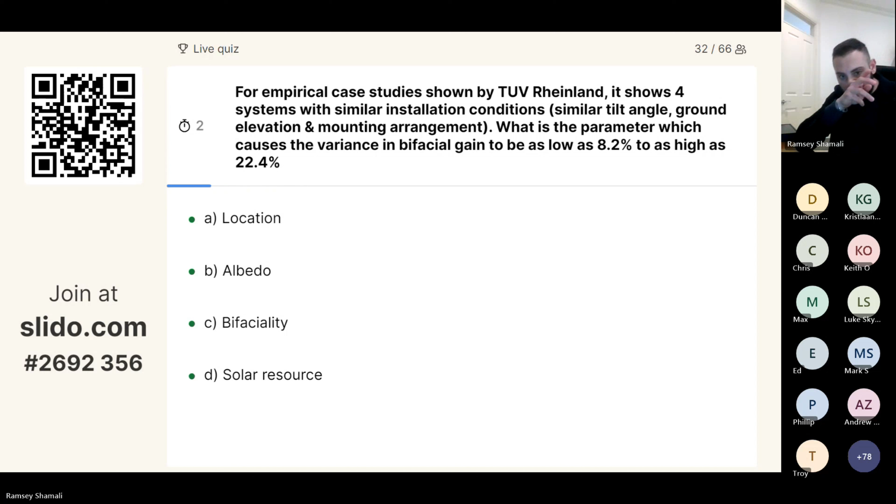For empirical case studies shown by TUV Rheinland, it shows 4 systems with similar installation conditions, similar tilt, ground elevation, and mounting arrangement. What is the parameter which causes the variance in bifacial gain to be as low as 8.2% to as high as 22.4%? Big variance here. Why? What were the differences? Majority answered albedo, and that is correct. Well done, guys.

Question 3. What would be the bifacial power output of a module that is normally 620 watts with the following conditions? Now, I haven't set a time on this one, so take your time, read it out loud, and answer whenever you're ready. I'll do it myself just to get a gauge on how long it'll take. So let's do it together. 620 watts, but it has bifaciality 0.8 and rear irradiance 150. So the resulting output will be...

I think that's enough time. So now I'll proceed to see what the answers are. All right, so we got A, B, C, D, and majority, is it still coming in? I think that's it. So majority answered C, 694.4 watts. Well done, guys. Absolutely correct. So if you use the formulation properly, this is the answer.

Last one of the day. Thank you so much for your patience, and apologies for going a little bit over time.